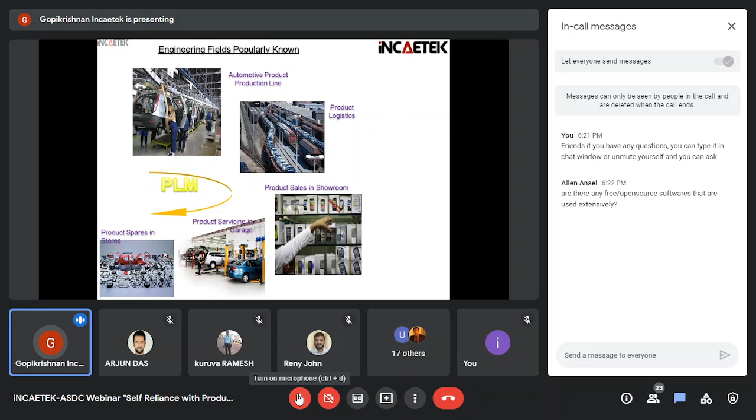Sales and service. We all know when we buy a product, we go from the showroom, we take it to the service garage or service center for repair and all, and then the spare parts engineering. So these are all the popular ones in the product life cycle.

But one step before that, who will design the product? Before you manufacture, you need a drawing, right? It's just like a cooking recipe and the dish. Manufacturing is the dish in hand, on your plate. But where is the recipe?

That is the drawing, the engineering drawing, which we all have tried and tested, whether it is diploma or degree or post graduation. In our first year, we have done engineering drawing. So it is that drawing, the top view, front view, side view, the same good old thing. That is the most sacred document for manufacturing.

So who will do the drawing? A design engineer. He or she will do the modeling, analysis, prototyping, testing, everything, and then the final design in the form of an engineering drawing is released. So it starts with a simple sketch and ends with a drawing.

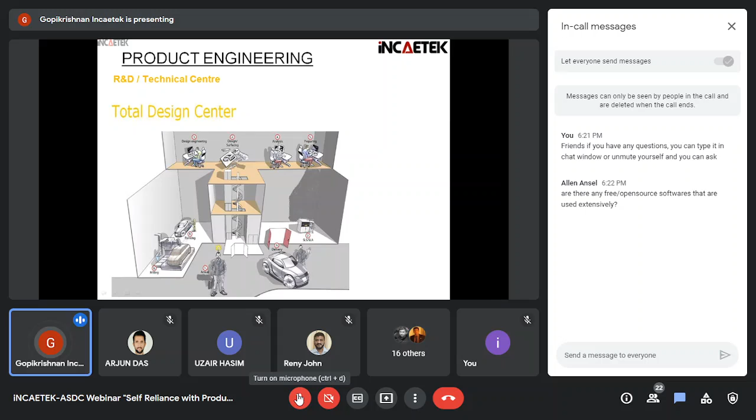And in between comes all these steps like simulation. I spoke a couple of times about what is simulation, crash analysis, aerodynamic analysis. So now this you would have seen. It is not animation, it is all behavior, Newtonian physics. Following engineering simulation is following Newtonian physics, right? It's all mathematical.

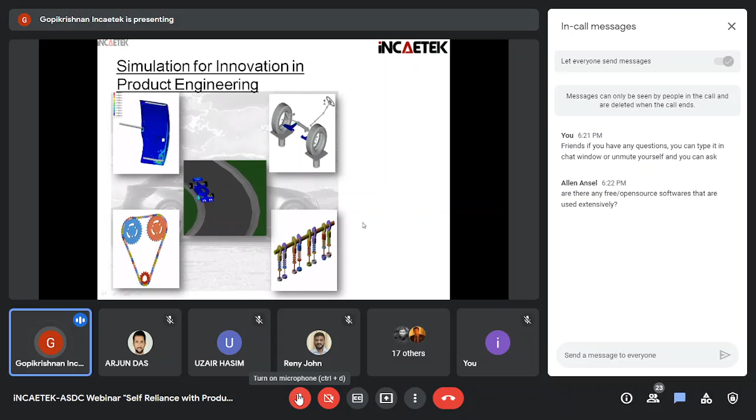So a scientific animation, you can call it a simulation. This is where CAE tools, computer-aided engineering tools like ANSYS or HyperWorks are used. Thus, virtual product development is everything. Everything can be done in the software, and that is computer-aided.

So one of the participants asked the question, what kind of software should you know? I replied, at least CAD and CAE data, but there are many more, like computer-aided industrial design.

I know some of the participants today are from the industrial design background, so they would have used software like Keyshot or Blender or even Rhino or Alias. Those kinds of software will help you do the initial sketching, then the CAD work. There are many more planning software, even for project management. So the popular ones I have listed here.

I have already answered that question. Now this is a sketch of how you do product development. So it is very easy to say you acquire skills and become self-reliant, but I told you it's not as easy as I say or you feel.

It's four months of effort you need to take to do these things practically. It is not learning any theory or books or anything. It's simply practicing what you have learned, or what you still need to learn some more.

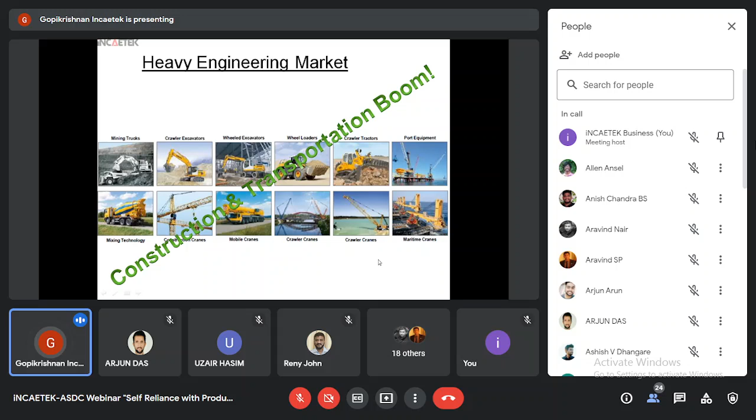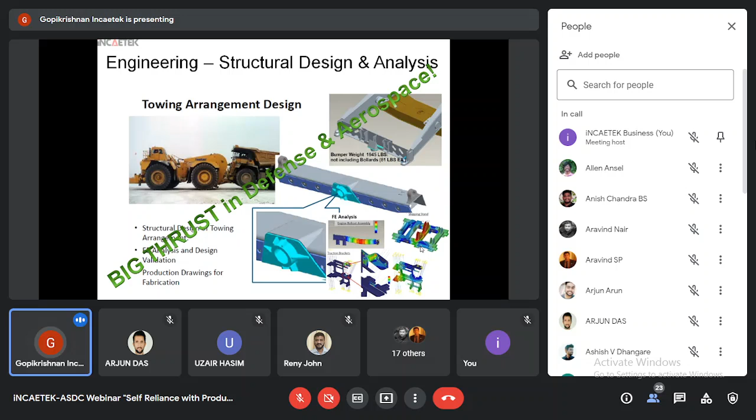Even to design such extraordinarily large heavy vehicles, it's fundamentally the same — how to design a frame. The same frame concept is there in an automotive chassis or even a bicycle frame. It carries maybe just two wheels in a bicycle, whereas it could be 10 wheels in a special vehicle, or 6 wheels in a multi-axle Volvo bus. Whether it's 2 wheels or 10 wheels, you need a frame to host it, and that's how you do the design analysis, just like the calculations you did in third semester engineering mechanics.

So I've again named a few companies here — a lot of jobs around, and this is how you practice. Some images now give you an idea of what design really is. It's not just drawing something or doing a CAD model; it's all the calculations behind that.

What kind of material is required, where to punch the holes, what diameter the hole should be, what fillet it should have, what tolerance is needed between parts — I won't add to the boredom by going deep into such jargon, but believe me, this is very exciting once you start doing it. Listening may not be that exciting, I swear, but doing is very, very exciting.

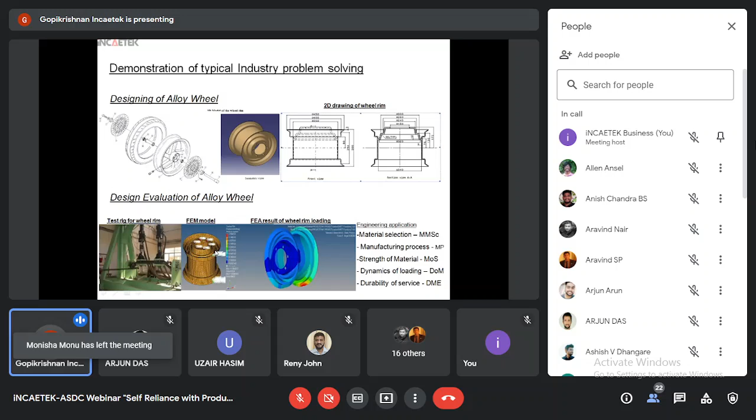If you've done testing in college labs, you'd validate somebody's design — go there, break it, bend it, test it, measure the flow and everything. Likewise, you can measure stress and strain in the lab or on the computer — this is computer aided engineering. You identify the hot spot where a crack can occur. This is analysis: once you know the design, only then can you analyze it, test it, or develop a prototype of it. So the essential thing is engineering design.

You do several case studies — I'm skipping a few things since time is precious. You're all welcome to post questions later. These are the kind of simple designs you'll handle initially, like designing a simple ladder and finding the bending in the third step or fifth step, where the maximum bending will happen.

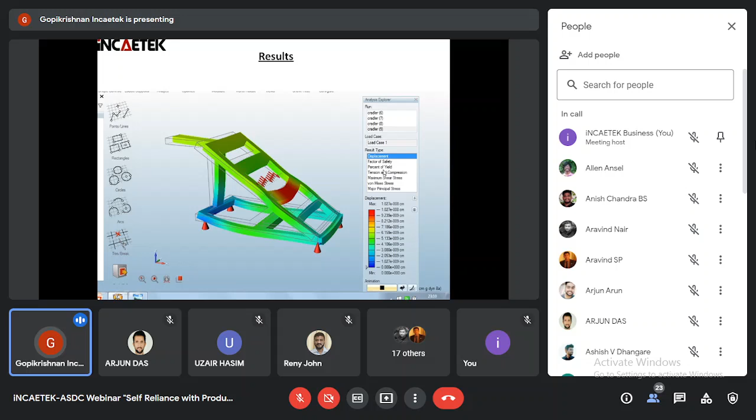This is where you use the software — you learn how to draw a line, draw a circle, extrude, all the CAD operations. At the same time, you do finite element analysis, learning how to do stress analysis, vibration analysis, and measure the factor of safety, all on the software.

Now, should I take a pause and take some questions? There are just a few more slides in this line.

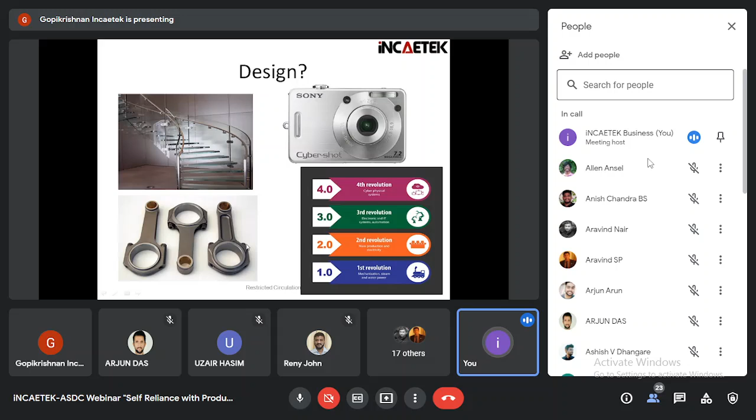Sir, when we think about the engineering analysis, of course we'll be applying all the concepts we've learned in engineering, maybe strength of materials or engineering mechanics. But to correlate the output we get from the analysis, or to validate that whole design, is a basic knowledge about strength of materials or theoretical concepts enough, or should we have more in-depth knowledge about the various criteria and failure modes? How far is the theoretical base important?

Good question, it prompts me to deep dive a little. You asked about validation of the design—yes, then you need more advanced knowledge. But if it's a simple design verification, that's the difference. If there's a step, and you want to know whether it will buckle or bend if a 100 kilogram man stands on it, that's simple design verification where the basics are enough—what you learned in the engineering curriculum.

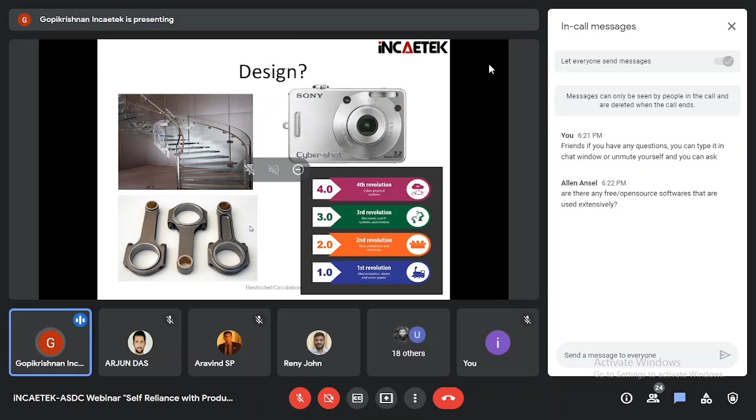All right, moving on. So design that way caters to anybody's need—it can be a design of a building, a small building or a very luxurious villa. Likewise an automobile, even a Tata Nano will serve the purpose; the need is to transport, whereas a Porsche 911 or Lamborghini will also serve the need for transportation, but at much higher utility—high speed, high performance, acceleration, braking, everything exaggerated for a Lamborghini, so to say.

But for executing the need, things start with the drawing—I told you, right? Everything starts from the drawing. We know, even if you approach a civil engineer to redesign your house or build a new home, you may make a drawing: this is where I need the master bedroom, a hall room, a study room, the kitchen should be there. You can make a drawing, but finally the contractor builds it as per the final engineering drawing by a certified civil engineer.

So a concept drawing anybody can make, but the final production drawing only skilled people can release.

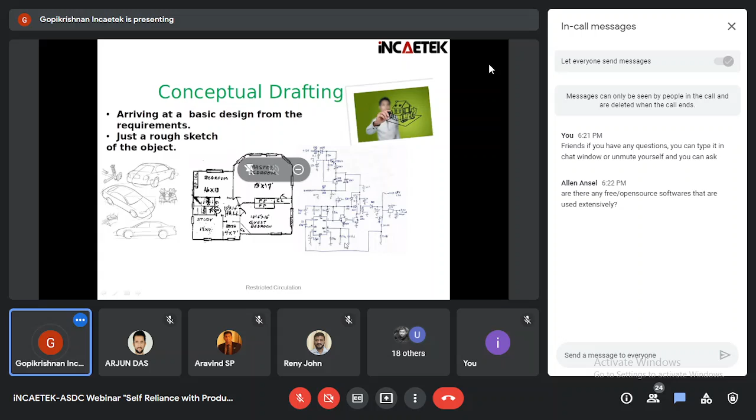Modeling, the CAD, using CAD software. You would have seen CAD walkthroughs for civil engineering, where people use software like AutoCAD to do the building. But for automobile design, nowadays AutoCAD is not at all sufficient. SolidWorks, CATIA, or Onshape like software is required to do the CAD modeling. It could be a motor, a car, or anything. The 3D modeling is done that way.

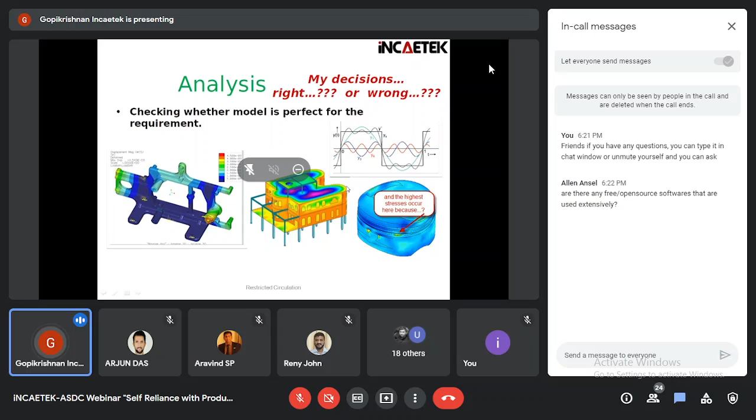Analysis performed with the easiest software is Altair HyperWorks. You can do the meshing, analysis, post-processing, everything within that. Same thing with ANSYS, Nastran, and such CAE software, where you are verifying your design. So if you are relying on the software, like the participant asked whether you need a deep understanding, may not be. The software will do the calculation, everything. Even if you don't know the theory behind it, the software will predict. But if you want to become a validation engineer, you yourself need to know all that the CAE software knows.

I won't take more than a minute here. It's as part of the design. I told you, right? It's a game. Designing is a game. You have to play all the parts.

Then problem solving, essentially ergonomics, how it suits the human being. Cost is a very, very important aspect. If you design a Lamborghini, you don't bother about the cost. But if you design a Tata Nano, yes, you have to limit everything to 1 lakh rupees, or now it is 2 lakh rupees. So then only it will have its intended purpose - a very cost-effective car. This is where a lot of skill is required - designing for cost, designing for manufacturing, designing for assembly, like DFM, DFA, designing for quality, and designing for cost, DFC.

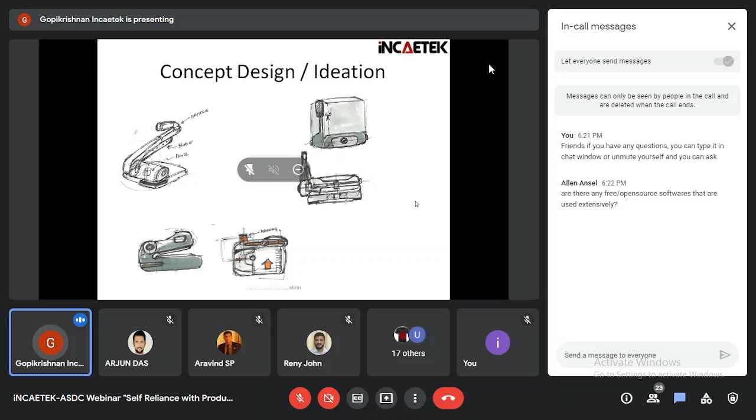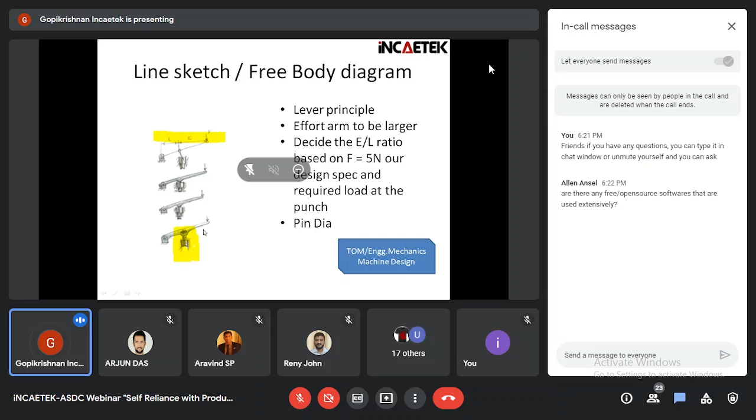So it's the basic process from concept, design or idea drawing, to doing all the calculations with respect, correlating with your theory subjects. You do all simple calculation - if you apply X force here and it's a lever, what is the force amplification, magnification, whatever. So this is the design calculation, and then you refine all your design for manufacturability and user acceptance, and you finally come up with the product development.

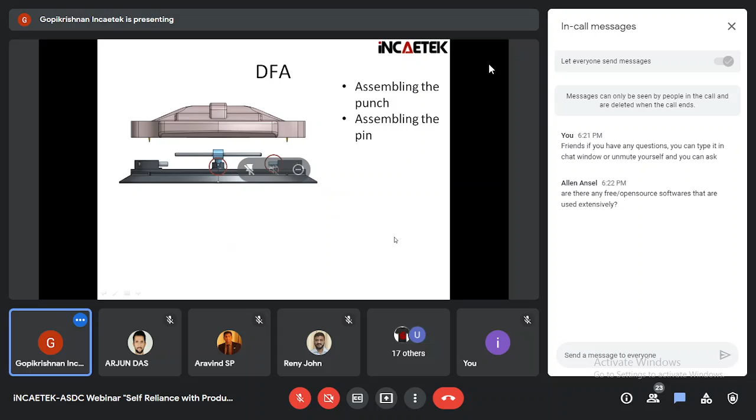So it's a combination of mechanical design and industrial design. Industrial design is those elements which pertain to look, feel, and other things - the color, look and feel of that. But the functionality is determined by the engineering design. I hope with these terminologies discussed in this forum, you have at least known what you know and what more you need to know. All right, so that's it towards the end of the technical part of it.

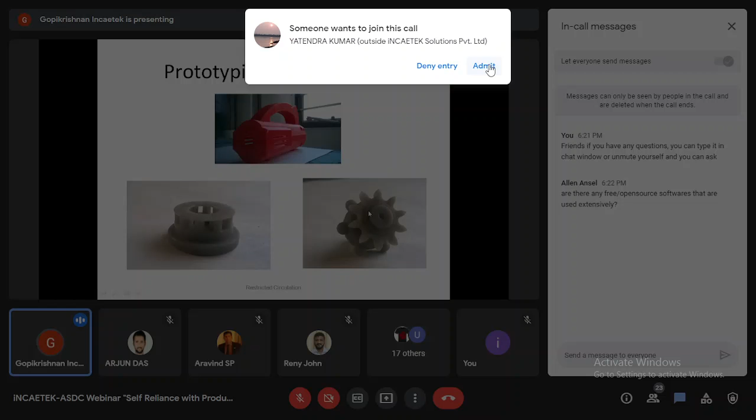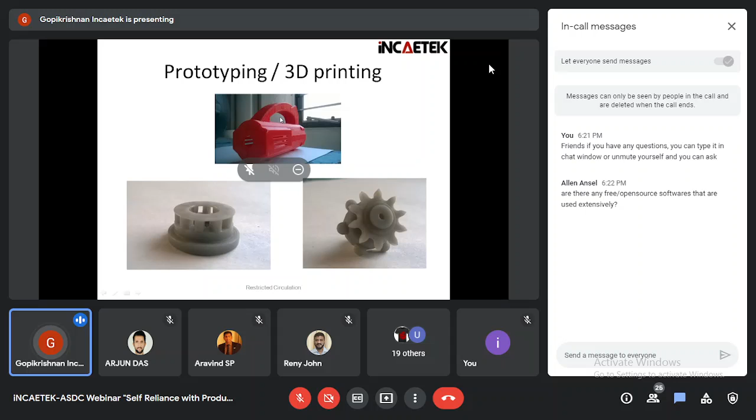Whenever you design anything, it could be a tabletop, you can do a 3D printing. Yeah, it's a tabletop device, right? It may take 10 hours to do the printing. If you create a Word document, you may print it in just 30 seconds. Whereas if you do a CAD model and give it to a 3D printer, it may take 10 hours to print a small 1 foot long device.

So that's it, these are the technical aspects of it. Anything else you can ask, but meanwhile I can just play it as a video if some of you have not gone through each of these slides. Parallelly I can answer your questions also.

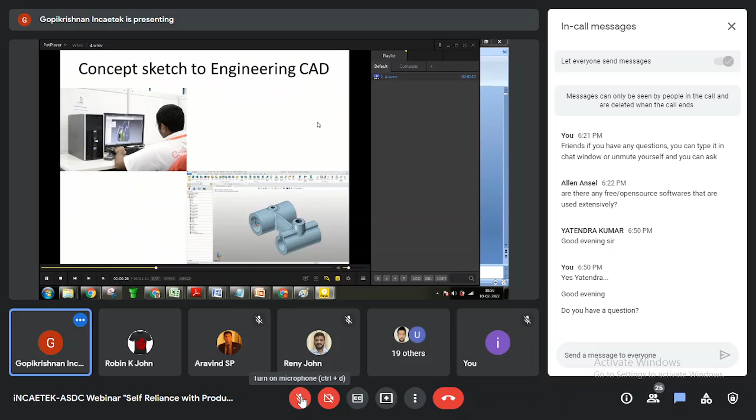Sir, good evening, this is Ashok from Chennai. Hello Ashok, how are you? Yes sir, fine, how are you? Thank you, very good, go ahead.

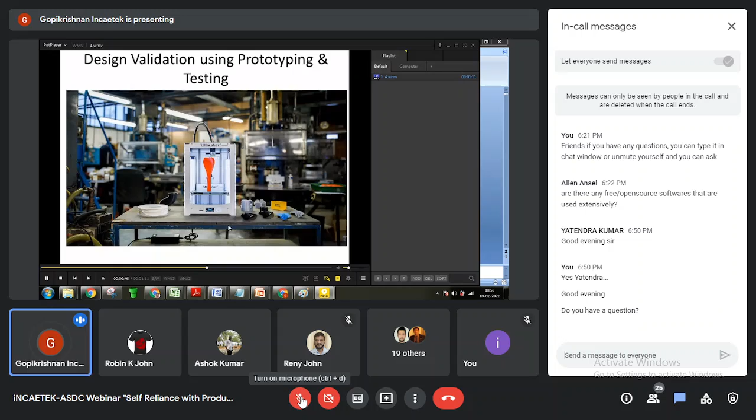Sir, my question is whether crash analysis and crush analysis can be done through ANSYS or Nastran or any other software. Of course, many softwares are there. There are specialized softwares like LS Dyna, now part of the ANSYS company. PAM Crash is yet another software. Altair has got Radioss. There are various softwares. These are all part of CAE software, computer aided engineering. It's not like a real crash test, but you can do crash analysis on your software. Any of these software can do that.

Okay, because as per my knowledge, I have been a corporate trainer for ANSYS, CAD and AutoCAD. As per my knowledge I have used ANSYS for dynamic testing, dynamic analysis, but not for crash analysis, because it needs something different.

As a trainer, I know you would have acquired the skills years back. But the company ANSYS has acquired the company LS Dyna only a couple of years back. So no surprise you have not used the crash module. I used the software LS Dyna 20 years back while working for Daimler in Germany - that's the first time I got to know it. But then this software became so popular in all Indian companies, Tata, Mahindra, even ISRO used it for crash landing simulation on the moon. All these things used LS Dyna. Now that is acquired by ANSYS, so you can purchase it along with ANSYS.